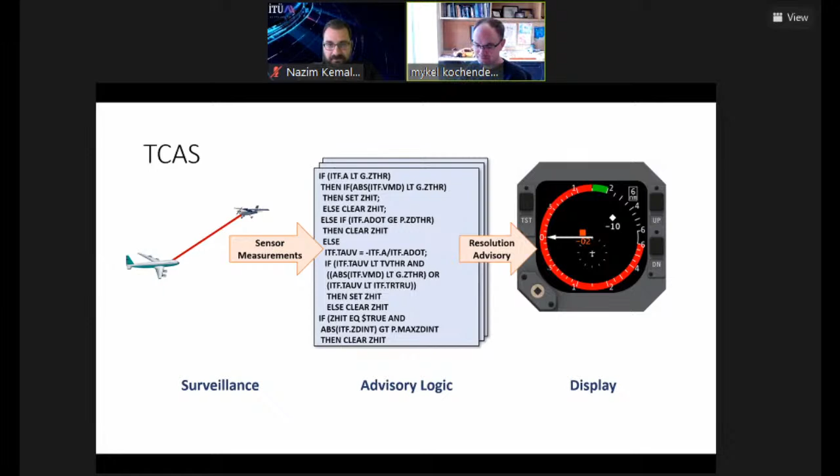So I'll tell you the answer. This is a screenshot of volume 1 of RTCA DO-185B, the TCAS standard. The first volume has 1,799 pages and 440 of it is pseudocode. I got to know many of the brilliant people who worked on this system, many of them since before I was born. It placed a huge burden on the designers to anticipate all the different edge cases and decide how to resolve them. It required a massive engineering effort.

So consequently, TCAS has been a major success story. Since TCAS was mandated in the United States on large aircraft, there have been zero mid-air collisions involving TCAS. Smaller general aviation aircraft, like the Cessna 152s I used to fly, aren't equipped with TCAS,

and there's a mid-air collision every month or so, just in the United States. When we were designing the next generation of this system, I was thinking about what makes this problem really hard.

It really boils down to three reasons. We have state uncertainty because our sensors are imperfect. We have dynamic uncertainty—there's quite a bit of variability in pilot behavior, and we can't perfectly predict the future trajectories of the aircraft. And we have multiple competing objectives: the system has to carefully balance safety and operational considerations. If the system's alerting all the time, then no one's going to follow it, and you wouldn't get the safety benefit.

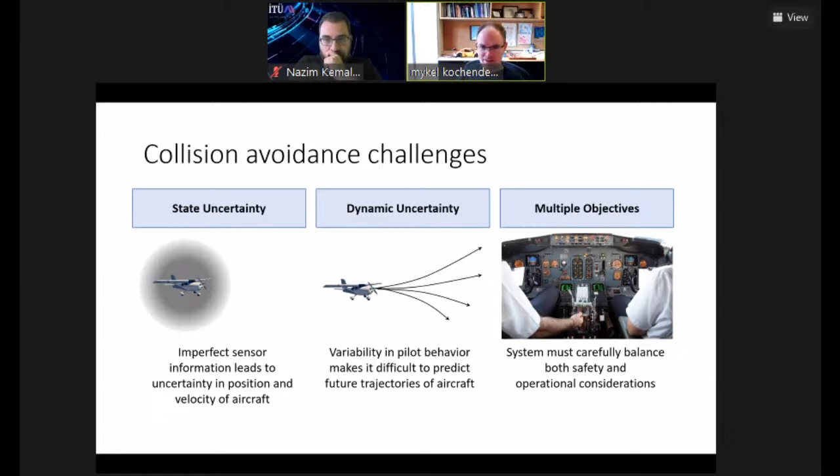So it turns out that the POMDP framework directly addresses these three major challenges head on. So what we did was frame this as a POMDP and then apply dynamic programming to find the optimal solution. I won't walk you through those algorithms—you can read about it in the book, or take one of Kemal's classes. But I want to show you the result of our very first experiment, back in 2007 or so, because it's pretty interesting.

It lowers the alert rate, because if you're roughly co-altitude, it's possible the intruder will go above or below us just on their own—embedded in this model is stochasticity. Second, it helps prevent you from committing to a direction you'd later have to reverse, which lowers the reversal rate. Third, it's just a lot safer, because when you do a reversal it eats up a lot of time as the aircraft converge upon each other. So this is actually what we wanted.

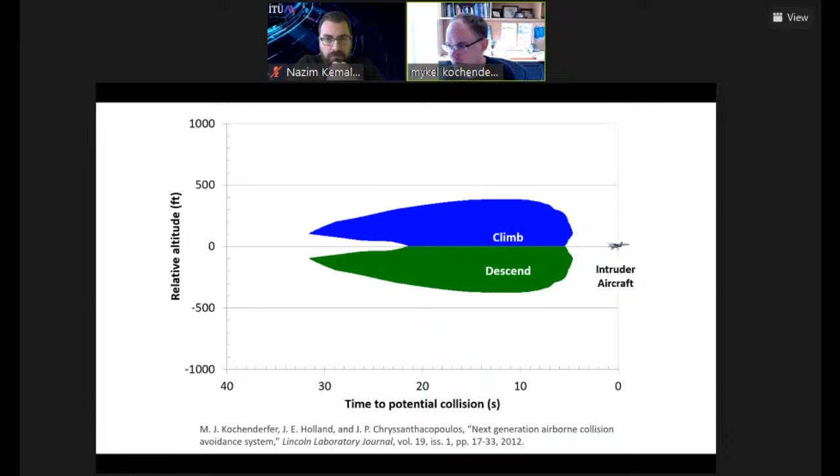So that's really not what we want, right? In reality, we have some hope that the pilot will respond immediately or in 1 second or whatever, and we're uncertain, so we should use a probability model for that and bring it in. That's easy to do with the POMDP, and we can resolve it—it pushes the alerting region over to the left.

So we ran a million stressing encounters with this very simple initial model. It was also just 2D head-on, so very stressing, not really meant to be representative of the actual airspace. But what we can see is that the NMAC rate, the near mid-air collision rate, drops by a factor of 50, while alerting only 70% of the time. It does strengthen more often. So strengthening is if you provide an initial 1,500 foot per minute climb, you can strengthen it to 2,500 feet per minute.

And the reversal rate is a lot smaller. So overall, this looks really good. But the FAA could look at this and say, well, I would like the strengthening rate to be closer to that of TCAS. Well, what do we have to do? We just increase the cost of strengthening, and then we rerun the dynamic programming.

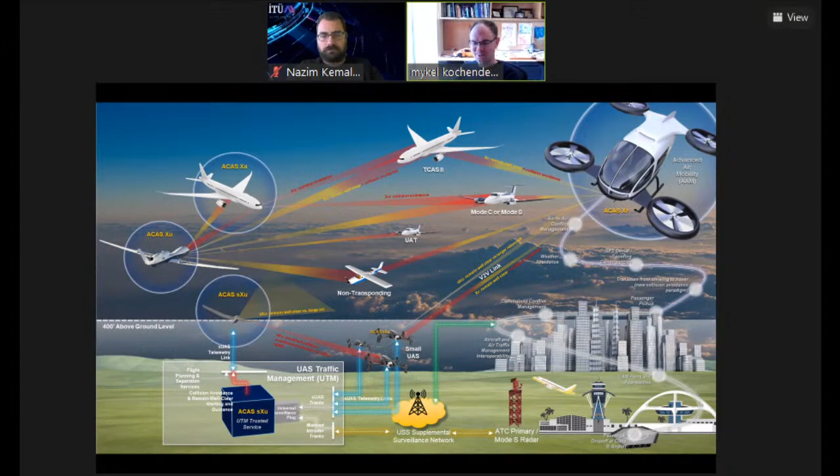Okay, so things have come a long way from that original experiment. This slide captures the different flavors of ACAS-X. There's ACAS-XA for large manned aircraft, ACAS-XU for large unmanned aircraft, ACAS-SXU for small unmanned aircraft, and XR for rotorcraft and advanced air mobility systems and so forth. And they all have to interoperate with each other. So this presents a number of verification and validation challenges, and I'm very excited about that.

So there are a number of different validation tasks. Monte Carlo modeling and simulation analyses can go a long way in validating a system. We're interested, of course, in estimating the probability of failure. This is difficult for a number of reasons. One is we need to run this in simulation, and we need a good model of the environment that we can trust. This model absolutely must be independent of the model used for optimizing the logic.

For ACAS-X, we used a relatively simple POMDP model, but we used a much higher fidelity model for the validation of the resulting policy. We collected 9 months of radar data from all of the FAA and Department of Defense radars and built up a Bayesian network to capture all the various statistical correlations between the various variables. Then we can sample from that many times to arrive at a probability of collision.

Since our systems are very safe, we naturally need many simulations in order to arrive at a good failure probability estimate. We can take advantage of importance sampling and the cross-entropy method to reduce the variance of our estimates, but we still need quite a bit of computation. So during the validation process of ACAS-X, we ran tens of billions of simulations, and we were one of the primary users of the Lincoln Laboratory supercomputing grid.

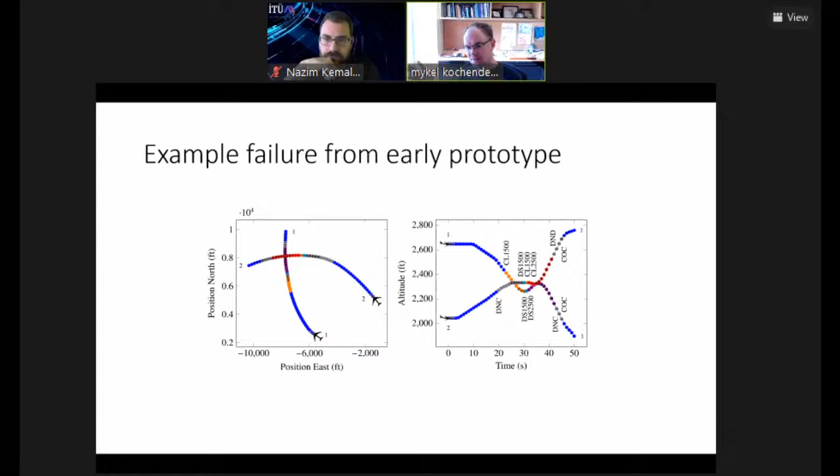And you get the full trajectories, so we can play this back in simulation and see what's going on. Maybe that suggests changing parameters in the Kalman filter or changing parameters in the reward function or whatever. So you want to understand the most likely failures during design time, so you can do something with that.

We've also applied this to automated driving. This is a little video from the Carla simulator. It's modeling a perceptual system, a computer vision system. You can see a bounding box around the pedestrian here, and there's a control system on board the vehicle. So we wanted to see if we could use that same code and find the most likely failure.

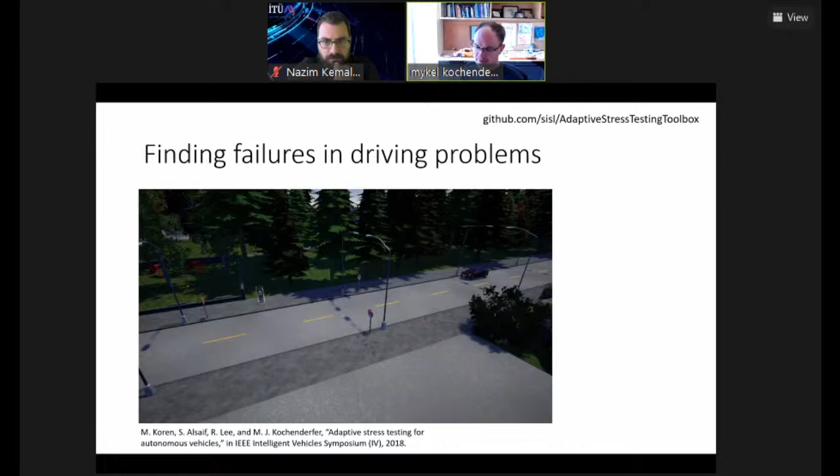And it turns out that we get this. And I think we can all agree that this is profoundly uninteresting, right? The pedestrian basically runs at our vehicle. There's nothing we can really do about it.

So what my students did was they incorporated into the adaptive stress testing framework the RSS system. RSS came from Mobileye, which was later acquired by Intel. And we incorporated that into the reward function to focus on finding problems where we are not at fault. So RSS assigns blame in

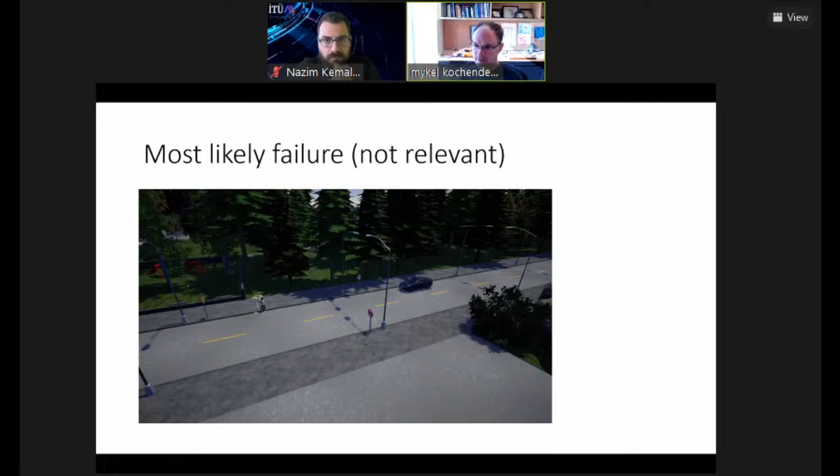automotive contexts. So we end up getting something that's a lot more interesting. So you can see the bounding box jumping around a bit, and perhaps our vehicle is driving a little bit more aggressively than we would like.

And this turns out to be the most likely failure. So this will suggest maybe we need to tune some parameters in the Kalman filter or change some of the parameters in our driving.

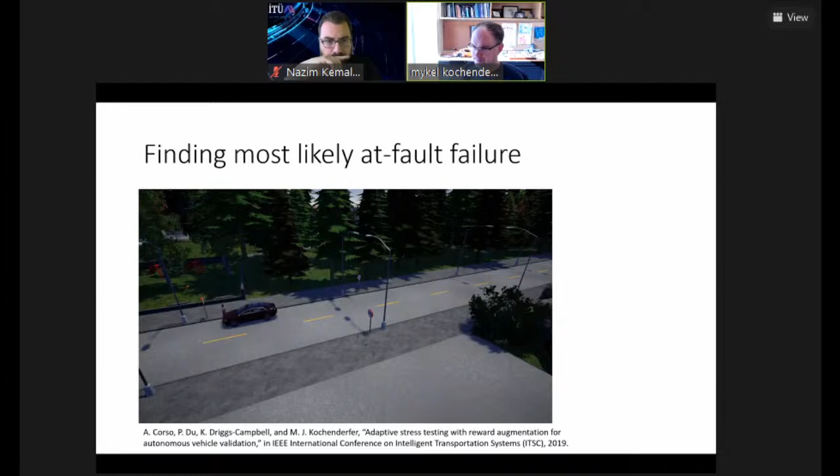Okay, so adaptive stress testing is a sampling-based method, as I mentioned, but regardless of whether we use Monte Carlo tree search or reinforcement learning in our optimization loop, we don't get any formal guarantees. We've explored the use of formal methods for verification, which do allow us to make formal guarantees about performance, at least guarantees with respect to some model.

A collaboration with others in the Stanford CS department a few years ago led to the creation of the ReLUplex algorithm, which is a sound and complete algorithm for verifying properties of neural networks. The properties are defined over an actual continuum of inputs, so infinitely many different inputs, and so there's no way to exhaustively enumerate all of them and check whether the outputs adhere to some property.

It actually involves formally reasoning about the individual weights in the network and arriving at a proof that the property holds, or if it doesn't, it'll produce a counterexample. And we can use verification algorithms to support reachability analysis, as I'll discuss shortly. We may want to prove that if we follow a policy represented by a neural network, that it is impossible to enter an unsafe set.

We have also done work on probabilistic model checking, where instead of determining whether a property holds or not, we can prove that a property holds with at least some probability.

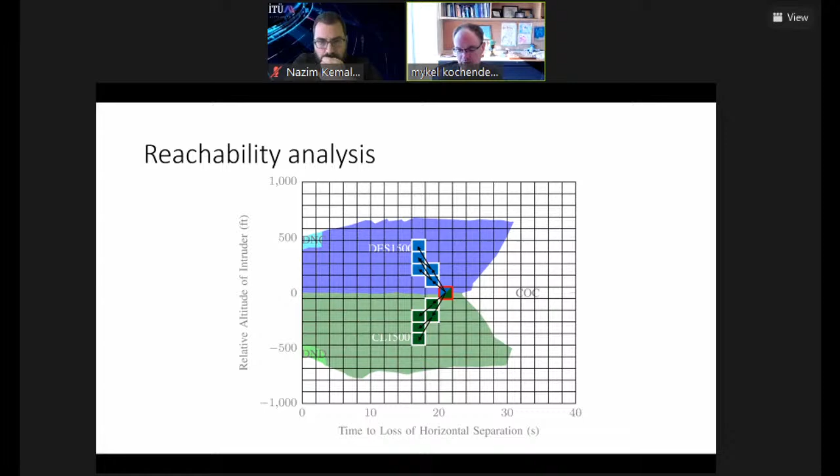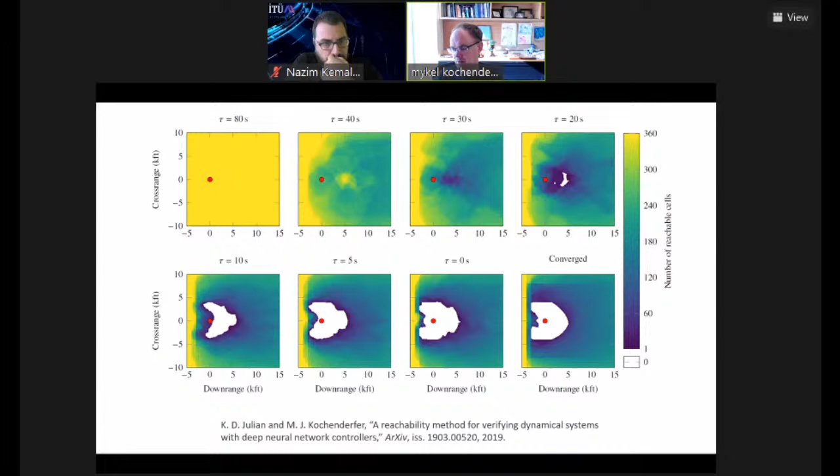We've done this for horizontal collision avoidance systems as well, and there are some neat plots that Kyle made here. We can see that the space around the intruder is unreachable. My student, Chelsea Sidrane, has been leading some work on symbolic methods for closed-loop reachability analysis that does not require discretization and may be more scalable to larger problems.

Together with a former postdoc of mine, they created a tool that provides relational piecewise linear over-approximations of multidimensional functions. This over-approximation can be used to represent the dynamics of the system. The example here is of the really simple inverted pendulum problem.

We start in some initial region designated by that square at the bottom left of the state space. What we would like to determine is what region we might end up in after 10 time steps. One approach is to run a bunch of simulations with our neural network policy in the loop, and we see that we end up in that orange region. Of course we don't have any guarantees, but that's roughly where we will end up.

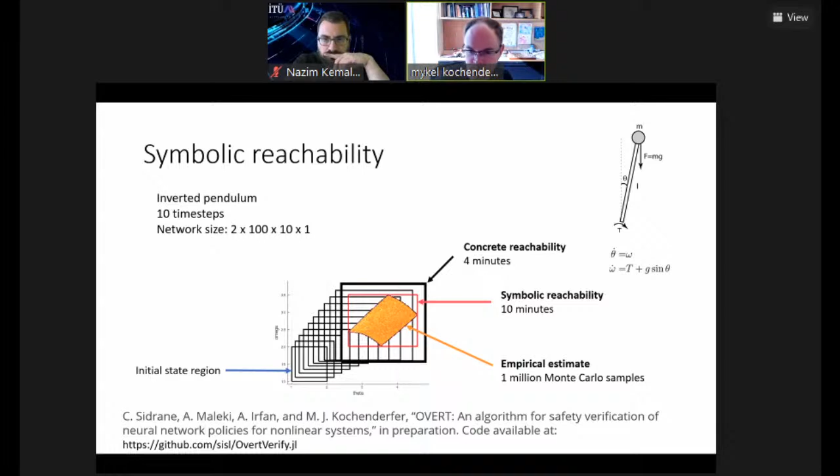Another approach is to use a mixed integer problem formulation and an off-the-shelf solver to determine the rectangle we will be in after each step, then iterate a few times. This approach is called concrete reachability because we make the reachable set concrete after each step. Another approach is symbolic reachability, which results in a larger mixed integer program that takes longer to solve, but can result in a tighter bound for where the pendulum might be after 10 steps.

I'll briefly mention some other work that Kyle Julian did together with former student Ritchie Lee, who's now at NASA, on TaxiNet. This is part of the DARPA Assured Autonomy program. We have this neural network that was trained to follow the runway center line, and this was done in the X-plane simulator so that we could run thousands of these simulations.

The question we wanted to answer is, can small perturbations to the image make the aircraft leave the runway or the taxiway? So maybe we allow a 3% perturbation on the image.

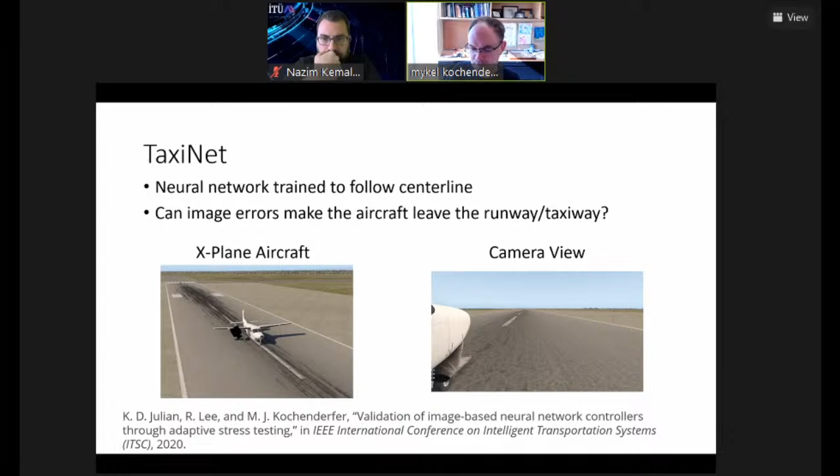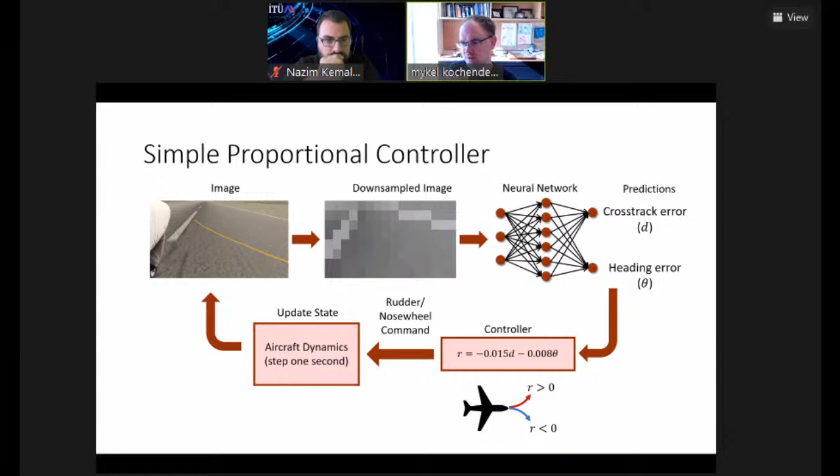So this is how it works. We take the image, we downsample it, turn it to grayscale. That image becomes the input to a neural network. The neural network outputs cross-track error and heading error. Based on those two errors, we have a very simple linear controller that steers the aircraft, and this is a closed loop system.

To start off with, we ran a bunch of simulations with a bunch of initial conditions, different lighting conditions, because we know that sometimes computer vision algorithms or networks can be sensitive to lighting conditions. But in our simulations, it all appeared very, very reliable. This is just a finite sampling that I'm showing here.

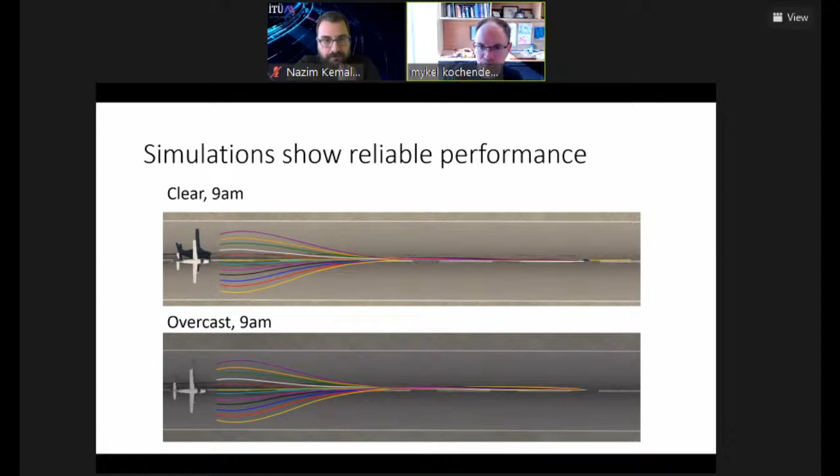So we wanted to see what would happen if we allowed 3% perturbation of the image input to the system, and see if those perturbed images could get the aircraft to just the left side of the runway. So we actually make a series of calls out to Marabou, the newer ReLUplex implementation, to find the perturbation that would lead to the most extreme left steering command.

As I run this video, you can see the trajectory evolve on the bottom left, together with the true image, the downsampled image, and the perturbed image. The perturbed image looks relatively benign. As you can see, we can get the aircraft pretty far to the left side of the runway.

But there comes a point when, despite the perturbation, the aircraft just corrects itself. So this kind of approach failed to find a failure trajectory.

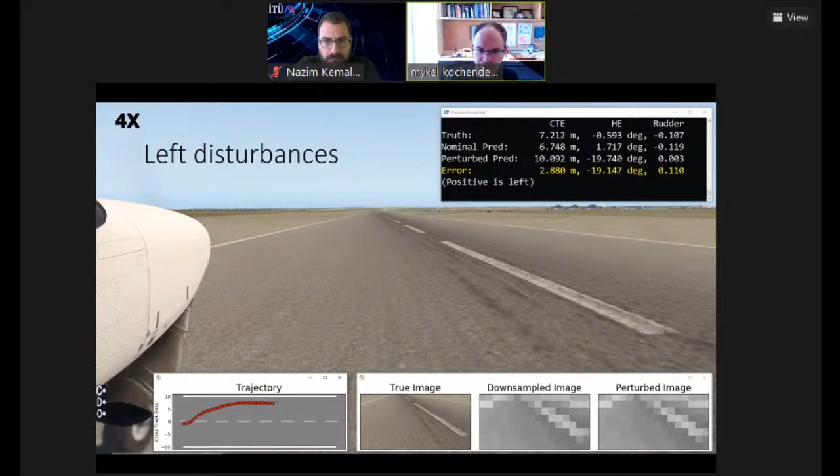So a key insight that we had was to combine this idea with adaptive stress testing. Instead of just constraining ourselves to extreme left steering, we wanted to allow for both extreme left and right steering. Adaptive stress testing could find the right sequence of image perturbations that could result in a failure.

In these series of plots, you can see the result of our Monte Carlo tree search, with a node shown in red, and the blue line shows the failure path. So with 2% perturbation, it actually couldn't find a failure.

But with 3% perturbation, it figured out that if you steer the aircraft over to the left and then produce an extreme right maneuver, it will end up in a position in the state space that's very far from the training set, and it will actually blast through the other side of the runway.

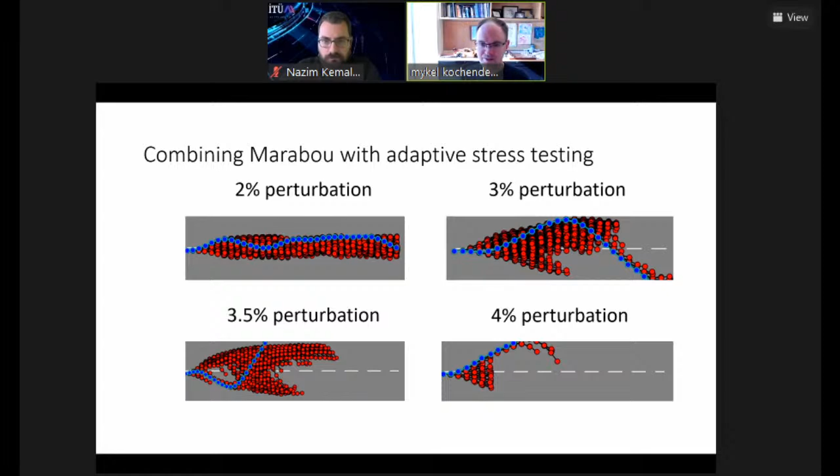So this was super cool. I was really excited by this result. And instead of just extreme left and right perturbations, we also looked at using potentially smaller amounts of perturbation, but in the right sequence, with the idea that smaller amounts of perturbation are more likely.

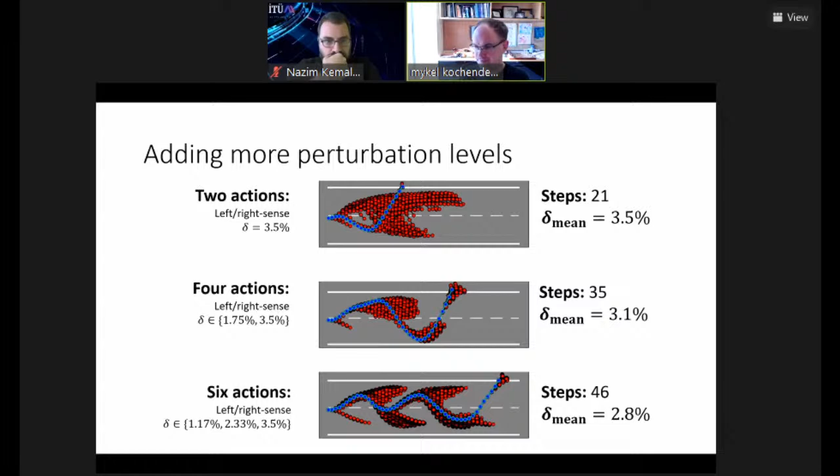I'd like to quickly mention some work that my former student Maxime Bouton worked on related to probabilistic model checking. The idea in probabilistic model checking is that you check whether some property holds with some probability. This property can be specified in some languages like STL or LTL, linear temporal logic. There are many great tools for probabilistic model checking, but they generally assume full state observability.

There was one exception, elaborated on in a 2017 paper, that involved partial observability, but the approach they took was to discretize the belief space and turn it into a fully observed problem. So, of course, this is not going to scale very well at all.

So what Maxime did was interface with a library that converts LTL formulas into finite state machines. Then he wrote a teeny little bit of Julia code that combines the finite state machine with the POMDP representation of the problem. That allowed us to use the POMDPs.jl package to solve for policies that maximize the probability of these LTL formulas, and it also tells us the probability of satisfaction. You can find an implementation of this online.

Led by my student Sydney Katz, we've also started to look at using probabilistic model checking to provide probabilistic safety guarantees when using a neural network controller.